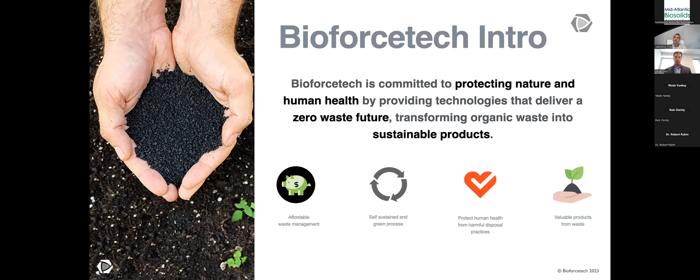Our goal is to transform organic waste and biosolids specifically into sustainable products. If we look at nowadays situation in the United States, mainly about 90% of the biosolids and residuals are utilized between landfill and land application. These 2 options, which have been going on for about 30 years, are now experiencing some pretty severe challenges.

Of course, landfill is probably the most impacted as far as we are experiencing a tremendous loss of value, potential contamination with PFAS, PFOA, CECs, leachate, and of course, greenhouse gas emissions. A bunch of states already have in place a landfill diversion for organic waste. And of course, costs are rising and capacity is becoming less and less available.

Land application, on the opposite, we of course support for those biosolids products so long as we can understand if they're actually being cleaned up, if contamination is really not present. But the point is compared to the previous 10, 20, 30 years, many counties and states are posing bans on using biosolids products on the land application. And we have the same problem at the end that is raising costs, limited capacity in some states or jurisdictions.

So at Bioforcetech Corporation, we do see waste as an opportunity, especially nowadays, with mainly 4 objectives and goals. We can generate renewable energy from those biosolids and residuals. We can remove contaminants, sequester carbon, and create renewable products from those biosolids.

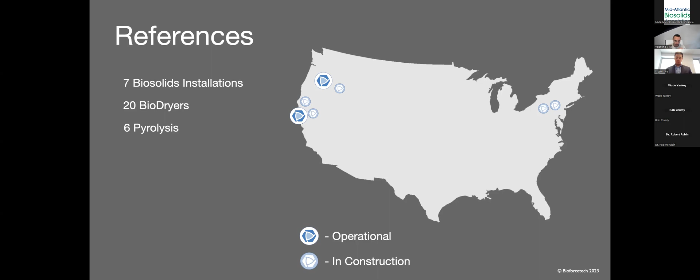The Italian market is another very good market for us, given the very dramatic situation with biosolids and residuals there as well, where they're seeing increasing tipping fees and costs of disposal, and options are very limited as far as what to do with those biosolids.

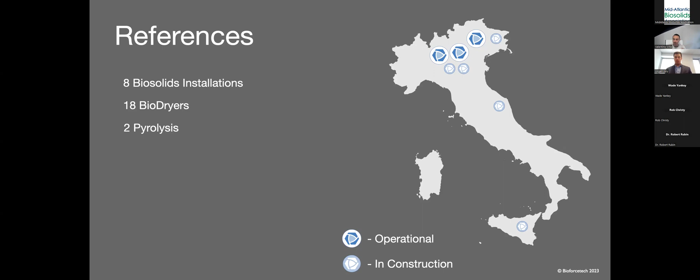So the Bioforcetech system is a 2-step process. The first step is bio drying, a non-conventional drying system that instead of relying on fossil fuel or expensive energy sources, mainly utilizes bacteria, so biology, to dry biosolids very quickly, efficiently, and reliably.

Once we're able to get to a dry product between 80 to 90% dry solids, the second machine comes into play. This second part of the process is our advanced pyrolysis system, with the main goal of transforming those dry biosolids into high quality carbon, otherwise named biochar.

We call it our carbon, our trademark and distinguishing factor as far as the quality and type of product that we can produce throughout our system.

Our goal is very much to stop producing waste, to remove CECs such as PFAS, PFOA, microplastics, and so on through the second step of pyrolysis, to produce energy that can be utilized by both processes to deliver an energy neutral process from a thermal standpoint, and ultimately to utilize our carbon to make sustainable and beneficial use products.

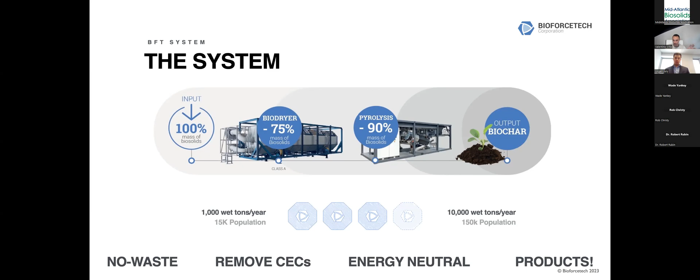Today's webinar is mainly focused on smaller utilities, which our systems can very much serve, from small to medium scale utility, with the sweet spot of the combined train—bio drying and pyrolysis—between 1,000 wet tons per year or less, up to 10,000 wet tons per year. In million gallons a day, that's a reference of between 1 to 7 or 8 MGD average daily flow. That's truly the sweet spot of how to best implement our technology within the wastewater treatment plant.

The first step is called the Bioforcetech bio-drying system, a biological batch drying system that operates at a maximum temperature of 160 degrees Fahrenheit, roughly 65 to 68 degrees Celsius. It utilizes a combination of biology—bacteria already within the feedstock itself, within those biosolids—in order to raise the temperature of the biomass naturally without utilizing any energy from the outside.

Most of the drying in a batch is covered by the biological process of bacteria, and the remaining portion of the bio drying is done through recirculation of energy from the pyrolysis step, if pyrolysis is combined with the drying system, or from a regular source of hot water at about 200 degrees Fahrenheit.

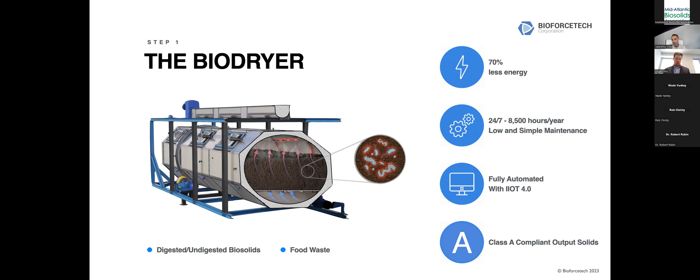The resulting objective is to remove water as efficiently and reliably as possible, with the goal of producing Class A compliant solids by EPA 503, with about 70% less energy than any other dryer can replicate in the marketplace. It's a fully automated system that runs 24/7, up to 95% of running time, so up to 8,500 hours per year, with very low and simple maintenance.

Some key highlights: the average capacity of a single bio dryer. Again, it's a modular and scalable system—the minimum scale is a single unit, and we can expand with multiple units. The average capacity of each module is about 1,000 wet tons per year, assuming 20% solids going in and 90% solids as the discharged product.

We have an average electrical consumption of about 25 to 35 kilowatt hours per input ton, and thermal consumption without pyrolysis is between 0.9 to 1.2 million BTU per input ton. Minimum requirement for solids concentration after dewatering is 17%, and the system can process stabilized or unstabilized solids—digested and/or undigested—so long as we have a minimum of 17% dryness after dewatering, and a minimum volatile content of 45% on dry basis.

The output from the biodryer can be adjusted between 70 to 95% dry solids, depending on how long we keep those biosolids inside the batch, inside the vessel. And again, it will be Class A compliant by EPA 503.

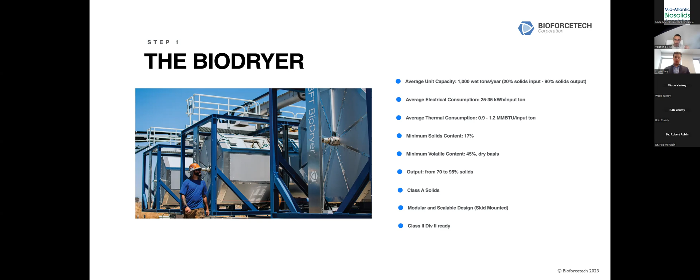It's a modular and scalable design where all of our units are skid mounted and pre-assembled and pre-built at the factory. So it's very easy for us to scale at any time, increasing processing capacity just by adding units as we want to grow. And of course, the unit is already Class II Div II ready, following the NFPA 820.

This is how the biodryer is delivered and built. It's comprised of two skids. The skid to the left has the main cylinder with the catwalk and the screw conveyor for feeding purposes, with motors and sensors. And we have the air skid to the right that has the blowers, the heat exchangers, and all of the piping, making a complete system that anybody can install directly on site.

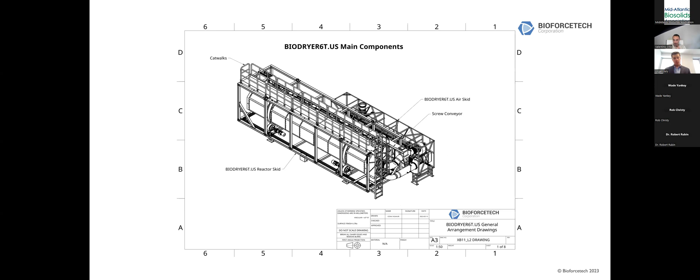Dimensions-wise, each biodryer has been maximized to be able to be pre-assembled and pre-built and delivered as a fully built piece of equipment. So we have a length of 40 feet, and it's 15 feet wide and about 14.5 feet tall.

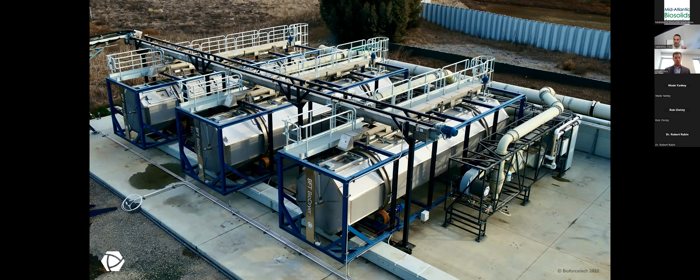Some pictures to help you understand better the scale and how we can expand. We go from installations that have a single dryer up to 3, 4, 6, 7, and so on. You can see some slides of installations here going from 3 biodryers, about 3,000 wet tons capacity, to one with 7 units, about 7,000 wet tons a year capacity, and 4 units, about 4,000 wet tons, and so on.

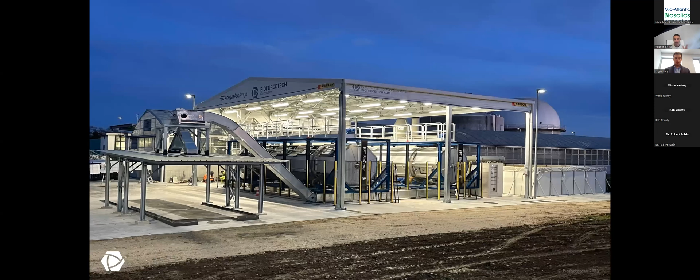You can understand the modularity, the disposition of these units once they are delivered to the client's location. We can expand at any time just by leaving enough space and working with the configuration to best accommodate units for the future, in case that will be one of the goals.

We manufacture our units near Monza, near Milano, in the northern side of Italy. We have a great manufacturing facility with about 45,000 square feet of space available. We have the capacity to manufacture about 30 machines per year and fulfill orders for customers in Europe and, of course, in North America.

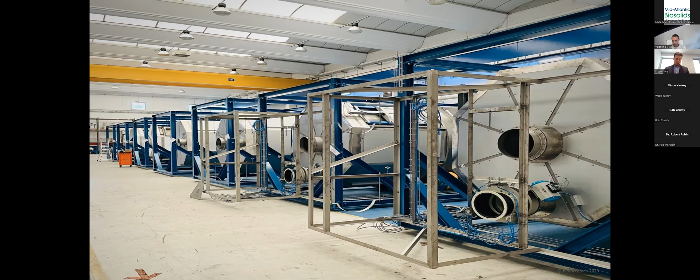So switching to the second step, our advanced pyrolysis system. After we dry those biosolids efficiently on the first machine, the advanced pyrolysis system has mainly 3 goals. The first is to produce the highest quality carbon in the form of biochar, our carbon, as we call it, without the production of any tars, oil, and hydrocarbons. So it's very clean for the process, but also for the end product, which will have no contamination and no resulting bio oil condensating on the char.

The second objective is to create renewable energy that the pyrolysis system will utilize to self-sustain the process from a thermal standpoint, and it will be able to feed the biodryers back with some extra energy to deliver an energy neutral process from a thermal standpoint. The unit follows the same concept here, so modularity and scalability.

The third objective, which is actually quite important nowadays, is an indirect effect of doing pyrolysis the way we do it: the ability to remove CECs such as PFAS, PFOA, microplastics, and so on.

On permitting, we started our journey with the EPA in 2015, receiving approval as a non-incineration technology formally by the EPA. We received permits to operate in the most difficult and stringent air districts in North America, including here in San Francisco, as well as other jurisdictions in Pennsylvania, California, Washington State, Oregon, and so on. So it's very permittable. We went through all the difficulties of permitting the first unit and facility here in San Francisco. Now new permitting applications are much smoother and quicker, due to all the data and source testing we've collected across the years.

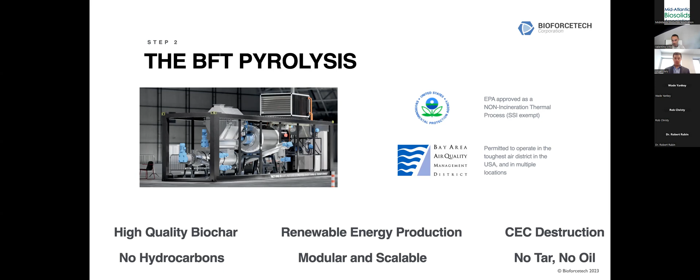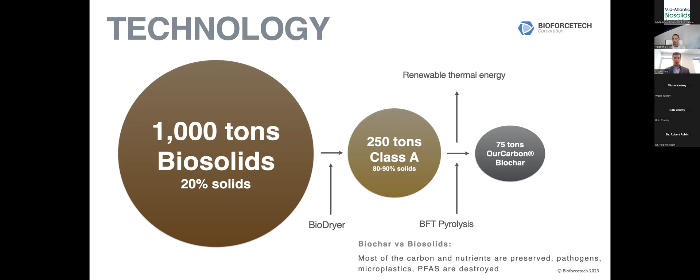A quick look at a mass balance: beginning with an assumption of 1,000 wet tons per year of solids at 20% solids matter. After bio-drying, those are reduced to approximately 250 tons of Class A material, between 80 and 90% dry solids, and further down to just 75 tons remaining of our carbon biochar, starting from the 1,000 wet tons. So we achieve a 90+% reduction in mass, which equals a 90+% reduction in trucks and logistics compared to the wet biosolids at the beginning.

Made with our carbon - again, the name and trademark of our biochar that we can produce through our system is called Our Carbon. The concept is very easy and straightforward: we divert biosolids, we divert organic waste from disposal in the landfill and/or land application. We transform those biosolids and we apply our carbon where it's needed the most.

What we've been doing across the past 6 to 8 years is producing and developing markets that were not existing before for our carbon and for biosolids-derived biochar, mainly ranging from soil amendment use for those biosolids-derived products to pigmentation and concrete additive. We've done great work.

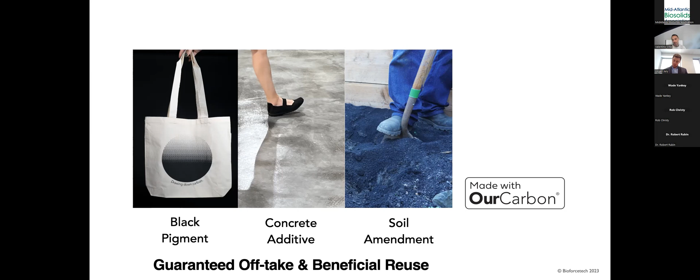So you're not going to be dependent on anybody else for off-taking, or limited by whatever capacity options you have - you'll be able to process and transform your solids in-house, having a consistent and guaranteed offtake for 20 years at no cost.

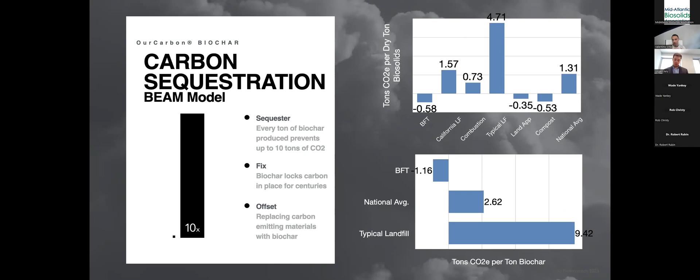Related to producing our carbon, one of our goals is really to also prevent and sequester carbon. Through biochar production, we are fixing carbon in a fixed form inside the end product. LCAs that we developed with third parties, using the BEAM model as well, are showing that each ton of our carbon produced is able to prevent up to 10 tons of CO2 equivalent, especially compared to landfill disposal. So great benefits from a carbon sequestration standpoint, where the BioForceTech system has shown to be the most effective in preventing and sequestering carbon compared to any of the other common ways of processing, disposing of, or beneficially reutilizing biosolids.

Last topic I want to cover for today, of course, is PFAS and CECs. We took it pretty seriously starting in 2018. Honestly, we didn't know back in 2016, '17, and so on that pyrolysis was also going to be effective at removing CECs - there wasn't this rush on what to do with CECs back then.

But starting in 2019 we started entertaining testing, and in 2020 directly with US EPA at one of our full-scale systems here in North America. With EPA, we identified 41 PFAS compounds to be analyzed. The equipment tested was the biodryers and pyrolysis system. We ran a total of six one-hour tests, and we analyzed the wet solids, the dried solids, biochar, tap water, scrubber water, and stack sampling, utilizing a novel method through FTIR and canisters.

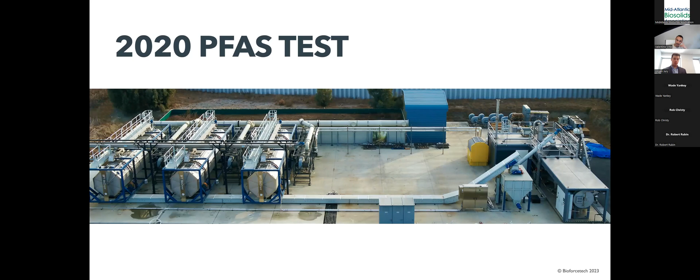This is a picture of the testing site - we have three biodryers and one single pyrolysis unit, with an average capacity of 3,000 wet tons of input material.

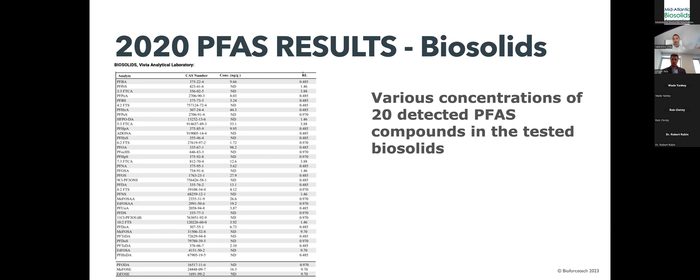Results came back with about 20 compounds detected in the wet and dried biosolids, with different levels of concentration, but definitely good enough for testing purposes to understand the fate of those constituents. Results for biochar came back non-detected across all 41 analyzed compounds, which was an amazing result that confirmed our first testing in 2019.

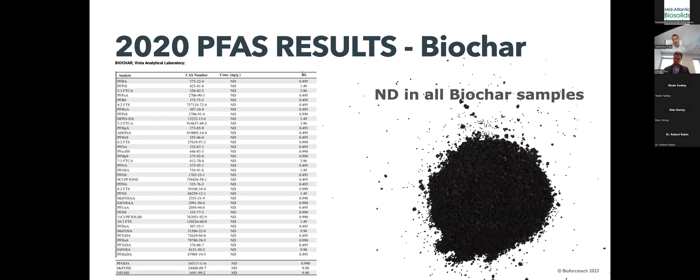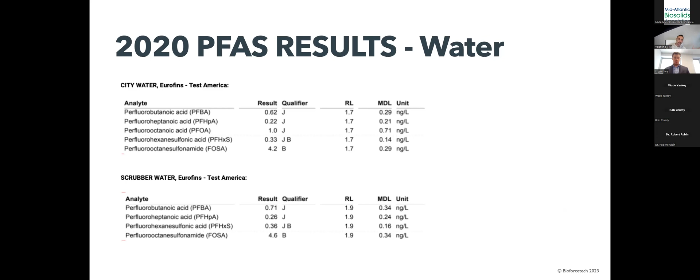This time we also expanded testing on the tap and scrubber water, and of course stack air emissions. On the water situation, unfortunately, city tap water had PFAS and PFOA in there, not surprisingly. The discharge water from the scrubbing unit of the pyrolysis system had the same level of concentration and constituents as the city tap water that was analyzed going into the scrubber.

The million-dollar question was on the stack sampling for air emissions. We utilized a novel method from the EPA, since they did not have an approved testing method back in 2020 - now they finally have one. Preliminary testing showed that nothing was detected above the detection limit of the instrument through the canisters. 17 analyzed fluorinated compounds were not found. The FTIR detected some gases that may have been related to the gas we utilized for the testing purpose.

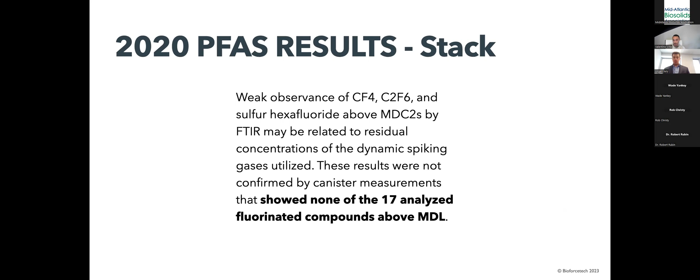The point here is nothing was really detected, although we cannot claim those were accurate and scientifically based because the testing method was not official from the EPA, but it's a very good start for understanding solids, water, and stack. This year we're seeking new and expanded testing with stakeholders and national consulting firms to finally understand the fate of PFAS, with comprehensive mass balance for those compounds. We already received preliminary testing, very encouraging, demonstrating that nothing ends up at the stack. We'll present all the data and findings in the next few months once we finish the new testing.

There's a great peer-reviewed article if you want to read more, specific to the 2020 EPA testing, which has been peer-reviewed and released in February 2022. Let me know if you're interested in receiving a copy, I'm happy to share the link.

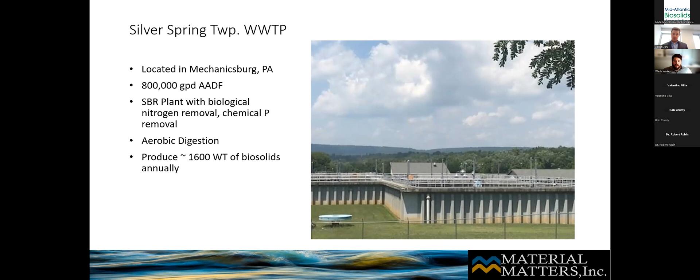So the challenge is Silver Spring Township has never had a beneficial use program in the past. They've always used a landfill, which is pretty typical for these kinds of small plants. I think it was never a major concern for them, as they had a competitive landfill price—their last contract was $70 per wet ton including transportation, so likely a tipping fee of less than $60 per wet ton, which if you do biosolids business in the mid-Atlantic, you'd be happy getting that price.

Unfortunately, that contract ends very shortly, and they're expecting an increase of roughly 100% for their next contract, up somewhere around $100 to $120 to $150 per wet ton. If that holds true, that's about a $112,000 annual increase in solids management costs. So at that point, they thought maybe they should look at other potential solutions for managing their biosolids.

Silver Spring contacted us to do a feasibility study to see if and how they can meet Class B standards without making massive changes to the treatment plant. They were open to some technologies, mostly lime stabilization, because they could input that at the end of the process without affecting the treatment process already established at the plant.

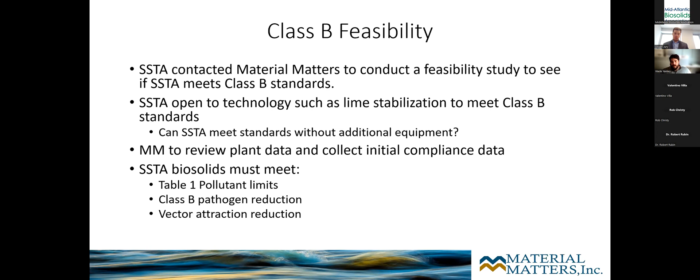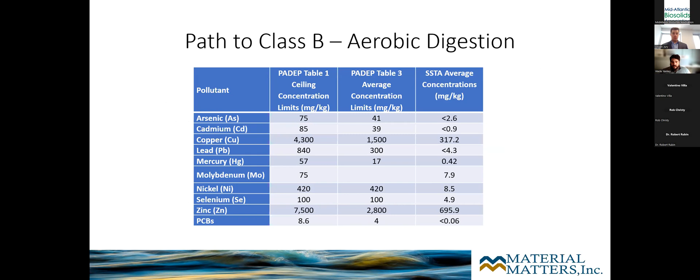So we didn't see any problems in their metals concentrations. In fact, all of them were not only below the Table 1 ceiling concentrations, but also the Table 3 concentrations, which we use for Class A EQ standards. This is sort of what we'd expect, and no changes are required to meet any of these limits.

Moving on to pathogen reduction, if you have an aerobic digestion plant, you basically have 2 options to meet pathogen reduction standards for Class B. Regardless of treatment technology, we can all use alternative 1, fecal coliform analysis, to meet Class B standards. Then there's a PSRP, process for significantly reducing pathogens, for aerobic digestion specifically.

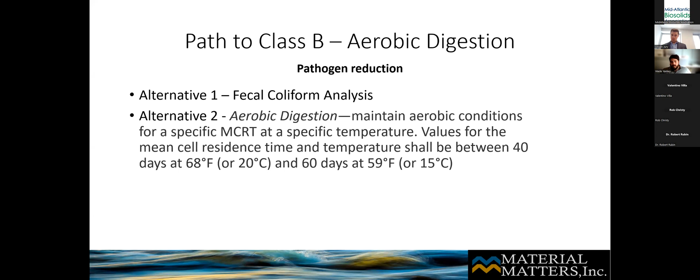That is, you need to maintain an MCRT between 40 days at 20C and 60 days at 15C. It's very unusual to find plants that have enough digestion capacity to meet this, and in this part of the country there are significant parts of the year where we operate below 15 degrees C. But we wanted to look at both options and see if they could meet pathogen reduction without making changes at the treatment plant.

So we collected samples for fecal coliform and had those analyzed, calculated the geometric mean. The geometric mean needs to be below 2 million for Class B standards, on a dry weight basis. Silver Spring Township was able to meet fecal coliform without making any changes, which was encouraging.

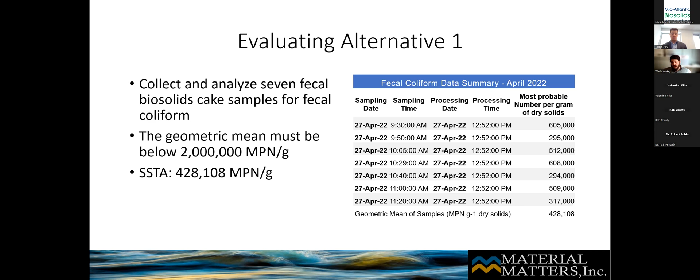Of course, many treatment plants would prefer to use a process-based pathogen reduction method over testing, for a number of reasons: the logistics of managing fecal coliform samples due to short hold times, cost of laboratory analysis, availability of labs, etc. So we did also look at alternative 2.

Going back to what I was saying about alternative 2, we're limited to temperatures of 15 degrees and above, so during certain parts of the year this alternative doesn't apply at all. So really, long story short, alternative 1 typically makes sense for aerobic digestion users.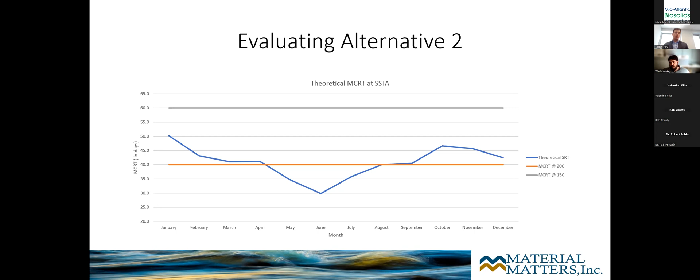So then the next thing we need to do is take a look at vector attraction reduction for aerobic digestion. We have really 3 options. Option 1 is, if you work with anaerobic digestion at all you're probably very familiar with it, and that's a reduction of volatile solids by 38%.

This is very unusual to actually be able to achieve in aerobic digestion. Also, the treatment plant did not routinely track this data in and out of their digesters, so we weren't able to calculate this with any certainty.

Option number 3 would be to digest your digester contents on a bench scale at 30 days, at 20C. If the volatile solids reduction is less than 15%, you meet vector attraction reduction that way. This is essentially an indicator of stability, that the volatile solids have already been significantly reduced in the digester, and this additional digestion doesn't show significant further reduction. We don't see a lot of folks use this, and certainly Silver Spring Township had not done this in the past.

But by far, option 4 is the most typical aerobic digestion vector attraction reduction method, using the SOUR test. The SOUR test has to be lower than 1.5 milligrams of oxygen per hour per gram. I know that's a mouthful.

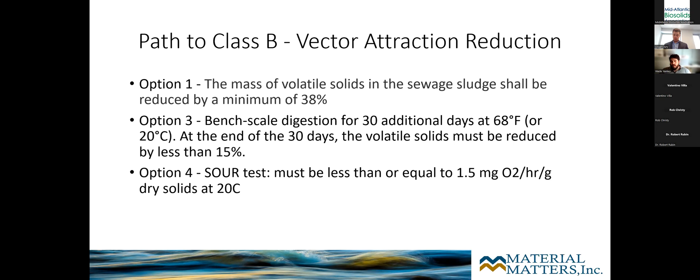All that to say, it is adjusted for total solids and for temperature. So we did go and do SOUR testing at the treatment plant. We did this at the end of April. The digester temperatures are fairly warm, so we would expect, in a warmer digester, more robust microbial activity. We would expect to be able to meet SOUR in warmer temperatures.

But the SOUR was actually almost double the standard. The standard is 1.5. The adjusted SOUR for this trial was 2.5.

Not being able to meet vector attraction reduction obviously limits your ability. I mean, you can meet class B and you can incorporate field VAR, but it certainly limits your ability to have a successful class B land application program.

So, being at the treatment plant, we felt like they had a considerable amount of digester capacity. We do see a lot of treatment plants that are short on digester capacity, and they just don't have the capacity to get the stability to meet vector attraction reduction, but it seemed that Silver Spring, relative to their size, had a considerable amount of capacity.

So we thought we should take a look at their actual capacities in more detail. They do have 3 aerobic digesters. They have about 710,000 gallons of capacity, and they only waste about 750,000 gallons per month. So that is over 28 days of MCRT, even if the digesters are not decanted.

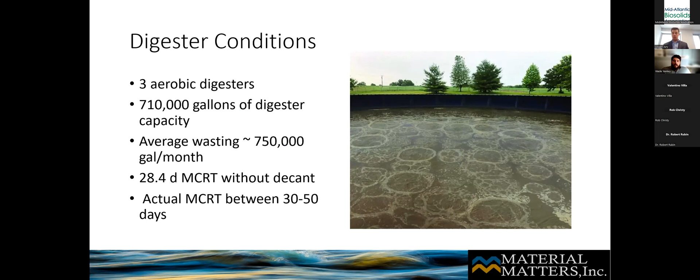So I wanted to compare that to some digestion design criteria to see sort of where they fell compared to what we feel like would be design standards. 59 is 15C and 68 is 20C. So we would be in this kind of range for hydraulic retention time. That's solid retention time without decanting. We'd be looking at somewhere in this like 50 plus days. So they're sort of borderline as far as the design criteria to meet the standards.

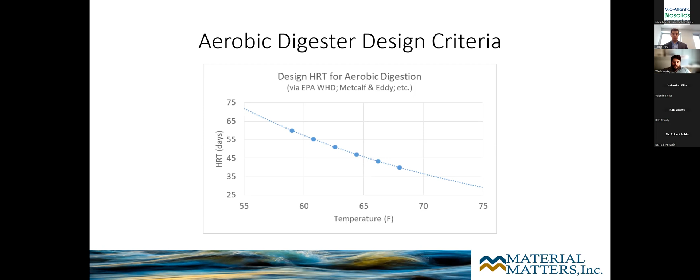But I wanted to take a little bit of a deeper look, and we've done some other work for some other utilities where we looked at degree days as treatment time as a function of degree days. Degree days is the product of the temperature in degrees Celsius multiplied by the SRT in days, that's the residence time in the digester. This number can be used to evaluate aerobic digestion below 20C.

We have a bunch of data from a similar treatment plant where roughly 300 degree days have been producing passing SOUR results. That's a WAS only aerobic digestion, similar upstream treatment processes. So I wanted to compare using some selected temperatures. SSTA doesn't track their digester temperatures routinely, so I just selected a bunch of temperatures to use as a benchmark to see if we felt like they would routinely pass this sort of 300 degree day benchmark.

You can see this is 20 degrees C, and then down to 8 degrees is the bottom line. We used the monthly average MCRTs against those temperatures, and plotted them against this 300 degree day benchmark. As you can see, only at the lowest temperatures do we ever dip below that 300 degree day mark, and the months that we do is in the summertime. They have probably the most wasting in the summertime as they're adjusting from the spring, bringing their MLSS down in their reactors. So we would expect that essentially they would meet this 300 degree day test all year long.

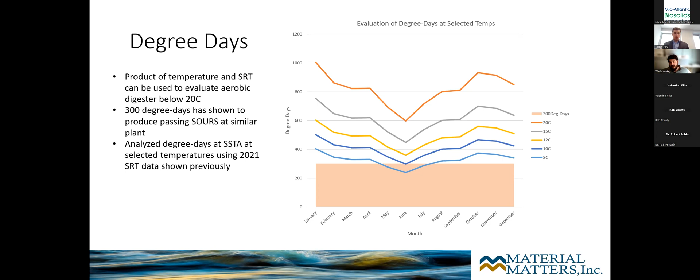So we started talking to the operators about how they operate their digesters. There's sort of a couple of ways you can operate an aerobic digester. The typical thing to do would be to just fill your digester with your waste activated sludge, aerate for a period of time, decant, remove whatever clear water you can, and continue to fill and aerate, and then dewater when you can no longer effectively decant your digester.

All 3 digesters could be operated in parallel like that. Or you could operate them in series.

And if you operate them in series, of course, you feed one digester, you decant it until it's full. We transfer to the next digester. We do the same thing. We transfer to the 3rd digester. And then ultimately always dewater from that third digester.

And what that does is maximizes your digester capacity because you're decanting as much as possible. It eliminates short circuiting, that is feeding the same digester that you would be dewatering from, which could put fresh undigested material into your digester, which could obviously skew your results.

And really the important thing is it maximizes your time under aeration. That's the main goal, right? We're trying to get as much time under aeration as possible to create the most stable product.

Because there's never been a beneficial use program at SSTA, they weren't really operating their digesters in either of these ways. They were really operating them more as aerated holding tanks. If they had capacity in one, they would pump to that one. If they had capacity in another one, they would pump to that one. They would dewater whichever ones were full, but not really with a real treatment scheme in mind, just sort of pumping to places where they had space to hold solids.

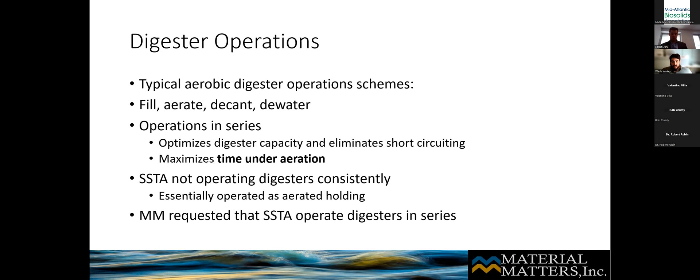And I went back in the wintertime and ran SOUR again after they had been operating like this for a few months. At a temperature well below that 15C that we talked about, just sort of where the regulation stops for pathogen reduction, and a considerably cooler temperature than we tested and failed at in the spring, they were easily able to meet SOUR at 1.2 milligrams of oxygen per hour per gram of total solids.

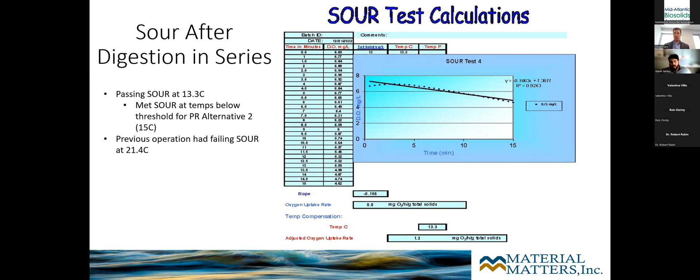I thought this was very convincing that we saw this kind of change through a simple operational change. So, they are, of course, going to now pursue coverage under the PAG-08, that's a Class B permit here in Pennsylvania. Of course, meeting the standards is not the only thing that will get you a successful biosolids land application program.

So I want to make sure we made this plug. Silver Spring Township is also installing cake storage. To have a successful and cost competitive land application program, you really need to be able to manage your solids in a way that falls in line with cropping and weather. And if you cannot meet total solids of 20% from dewatering, you are not allowed to store on the farm. So that basically severely limits your ability to haul and land apply during significant portions of the year, being the winter when we have freezing, when there's crops on fields, and really anytime the weather interferes.

And Silver Spring Township does not dewater to 20%. So they are installing storage on site to make this a more attractive and more successful land application program. And they are not planning any solids treatment upgrades. Of course, we're not talking about the things that could come in the future. This is their plan to manage their solids before any of those triggers come into play. But I just thought this was a great example of being able to take the things that you have and make a few strategic changes and really see results on the other end.

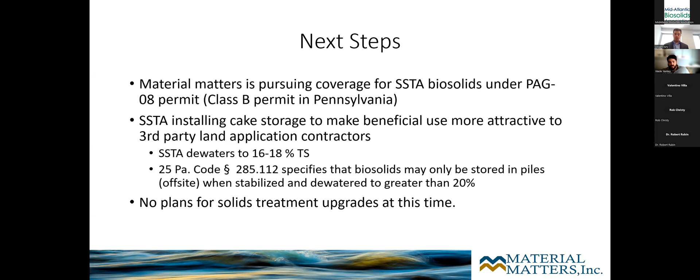Thank you, Wade. Yeah, it was pretty interesting. And I think it speaks to one of the challenges that we have in the Mid-Atlantic region, where smaller facilities, sometimes the operations of their existing systems are not optimized. And keying in on that can really save clients some money.

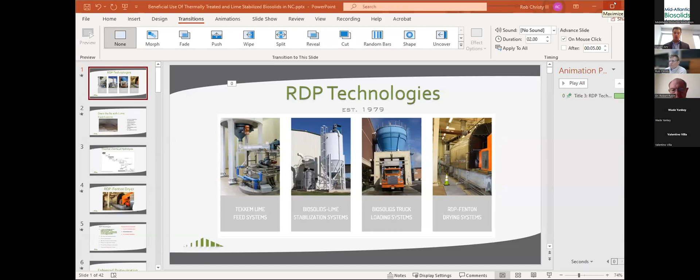So as a quick bio on both these guys, so we know what's going on. Dr. Rubin is an emeritus professor, as I mentioned, at NC State University. He's been involved in water and wastewater management for over 50 years. Throughout his career, he's focused on land-based and natural systems for treatment and management approaches that are reliable, resilient, and sustainable. He was a visiting scientist at US EPA, where he helped with development of management and design guidelines for decentralized wastewater systems and other natural systems.

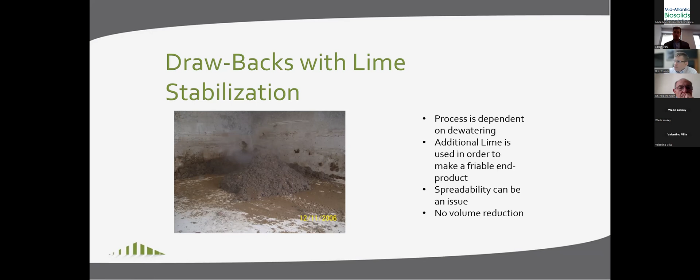So essentially, if you had a 15% cake, what would happen is you would have a wet product going in, and you would basically have a wet product going out that wasn't stackable or friable. So the process is typically dependent on dewatering. Now, the only way you can counter that, because there is no evaporation really going on of water, is the addition of lime to the product. So with the 503s, typically you need just enough lime for the pH to get to 12, and that typically could be anywhere from a 10 to 25% lime dosage. However, with Class A stabilization, what would continuously happen was the addition of more lime to bulk the product up, and then you would be looking at anywhere from 60 to over 100% lime addition. That would not only add obvious operating costs, but with that amount of lime, you would significantly reduce the amount of acreage you could apply to a farm. So you would be getting negative benefits, both agronomically and at the wastewater treatment plant.

And when RDP started with Class A stabilizations, this required a lot of studies to be done, and we started working a lot with Dr. Bob Rubin, specifically in North Carolina. We continue today with this slide, showing another process where we're developing a composting process using natural heat.

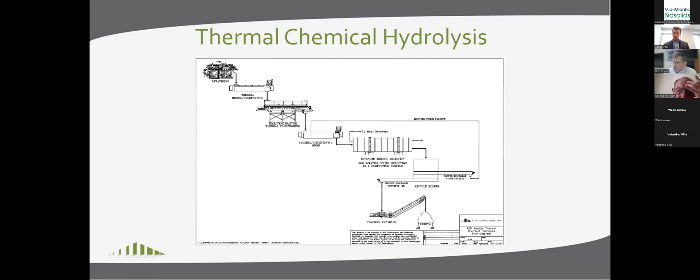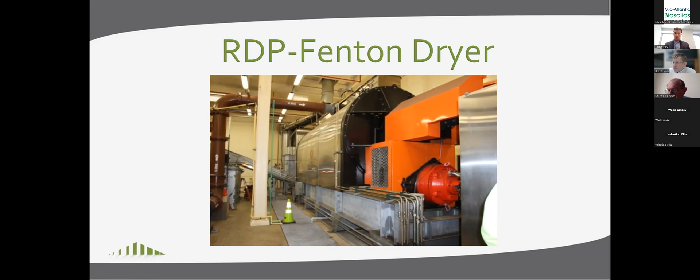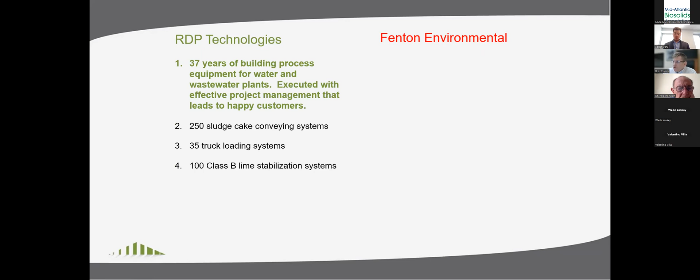Morehead City is a coastal community, small coastal community with acidic soil. Because they have acidic soil, they were interested in lime stabilization for the benefit of treating the local soils, and they were also interested in a biosolid dried product where they were getting volume reduction. Then subsequently in 2015, RDP had purchased the intellectual property to the Fenton dryer. Fenton had basically cut their teeth industrially, whereas RDP has primarily been in the municipal industry. So there was quite a bit of synergy there with their mechanical process and our know-how, and it became a pretty good fit for both of us.

So as I said, Morehead City is a small coastal community, and in venturing out into a Class A product, they were looking for a soil amendment that would best help them distribute the end product in and around the community. In evaluating those two different technologies, they saw some drawbacks. What RDP came up with was basically a third option, where we tried to merge the two inherent values of either process and hopefully come up with a better solution for the small community.

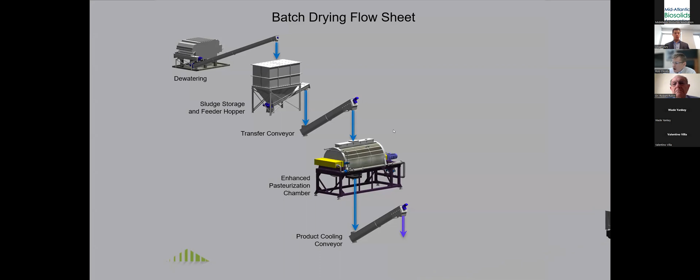If you look here, this is just a quick flow sheet of a typical batch dryer, which was kind of the premier technology for small communities at that time. You have a wide spot in the line for your sludge, you basically have screw conveyors coming in and out, and then a dehydration chamber in the middle for evaporation. Now, what RDP did was basically meeting in the middle.

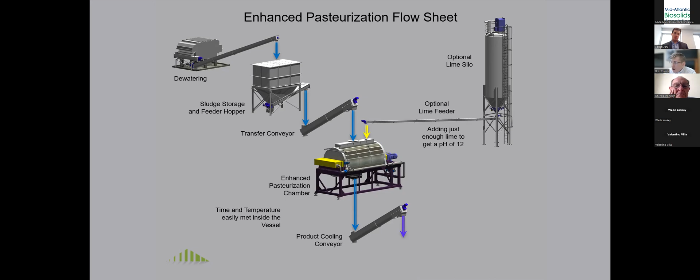We added lime to the system. Now with the pasteurization chamber, we don't have to depend on dewatering anymore. We can get to a moisture concentration that's desirable both for the plant and volume reduction, but also for the local farming community. This allowed us to get away with the traditional negative effects of lime stabilization, and because we weren't dependent on dewatering anymore, we can add just enough lime to get the pH up to 12, without adding more as a bulking agent, significantly reducing chemical costs for traditional lime stabilization.

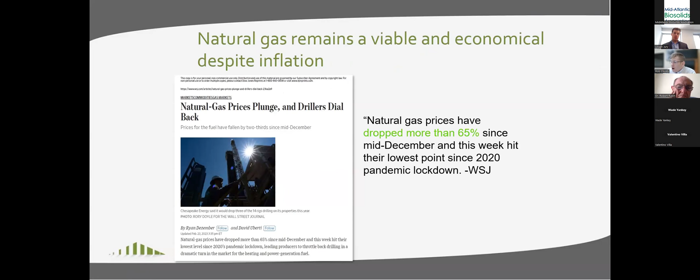Natural gas is still a tried and true method for heating sludge. With thermal fluid systems, the nice thing is they're pre-engineered and require little maintenance compared to other technologies, specifically steam or dusting issues. That's the typical flow sheet of a system on skids from Fenton drying systems.

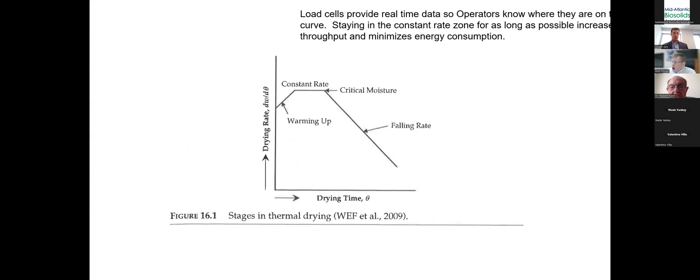One of the key features RDP added to significantly enhance this process was putting the system on load cells. That allowed us to do three things. First, it allowed us to dial in the moisture concentration.

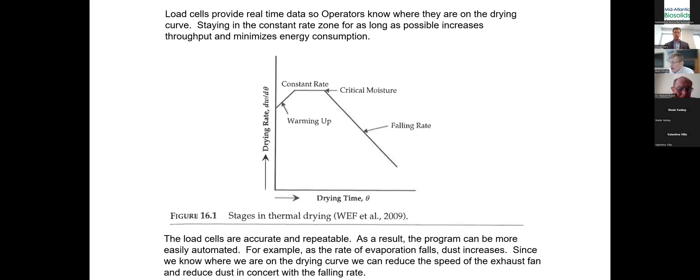This is a graph looking at a traditional batch dryer, showing where the optimal drying rate is, and it allowed us to optimize that.

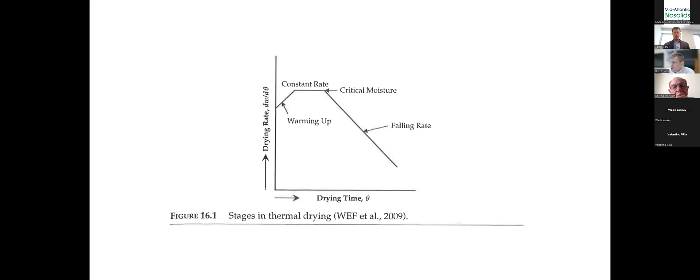And lastly, automation, where the system can run pulse feed and pulse discharge of both lime and sludge automatically, as opposed to the previous technology where that was not possible. This slide basically explains the same thing.

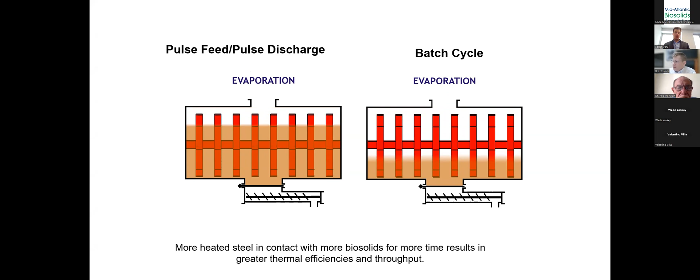Here's an animation of it. Instead of running in batch mode, RDP could evaporate to a certain solids concentration and then add more sludge. We could probably do this three or four times before starting to come up against torquing issues, but this allowed the system to become a lot more efficient, getting more sludge in contact with the hot oil disc.

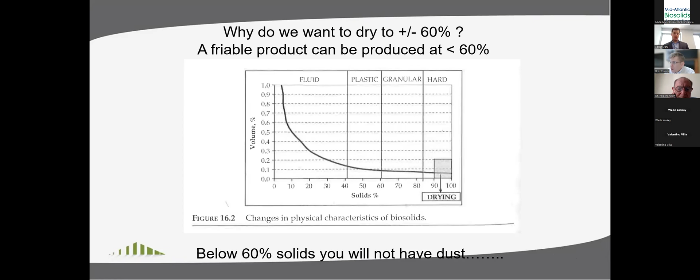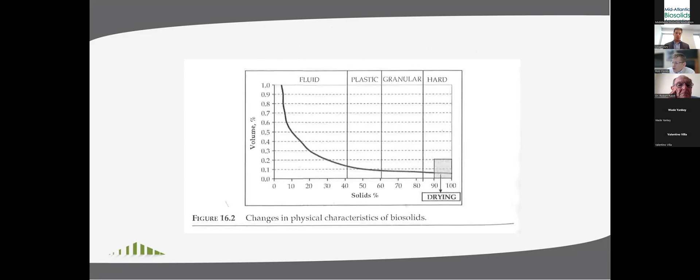With this process, because we're adding lime, we don't have to go to 90% — we're technically a pasteurization process. The load cells also allowed us to optimize the solids concentration. Historically, this graph shows what dryers encounter going down the sliding scale to 90%. Because we add lime, we can get anywhere from a 55 to 75% end product, with our sweet spot being 55 to 65%. That gives us about a 3-fold volume reduction versus a 4-fold volume reduction.

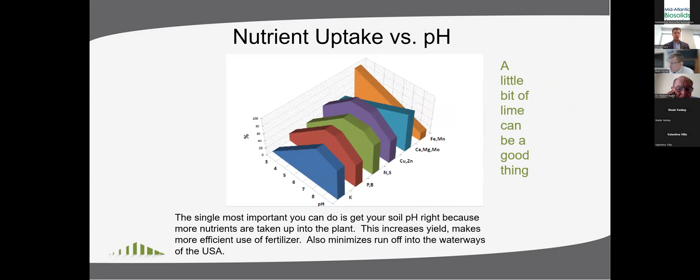So the question is, why pasteurization? For this facility venturing into Class A, what they liked was the flexibility of pasteurization. It also has a commercial name similar to composting, and as Dr. Bob will talk about, it was necessary for nutrient uptake with the additional chemical.

If I can, hopefully I can play the slide very quickly. And if I can't, I'll just leave more time. It was working earlier, sorry. All right, moving along. So I can come back to that.

As I kick it off to Dr. Bob Rubin, I was going to leave with this slide where hopefully we can show the benefits of adding a little bit of lime as a positive influence. So with no further ado, Dr. Bob Rubin. Thank you — and just go through the slides real quick, if you would, please.

That's me, and I'm not going to belabor that. I think our goal — everybody in the biosolids industry has the same goal — is to develop a comprehensive approach to wastewater treatment and solids management that will assure the recovery of nutrients, energy, and water in a sustainable manner. That's what I call the new paradigm. We've certainly achieved that in Morehead City and some other applications here in North Carolina.

Residuals, you all know this so I won't belabor it, but residuals are a significant management issue for municipalities and wastewater treatment operations internationally. It's not unique to North Carolina or to the states.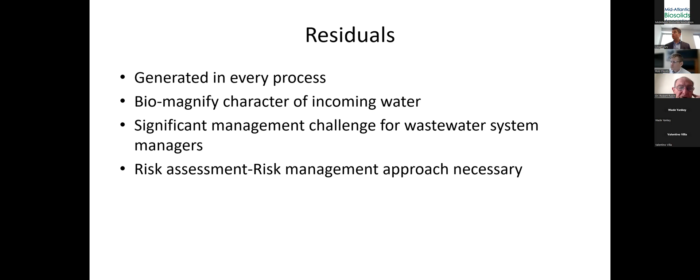And land application does have a lot of benefits. We can do PFRP, Class A product, with fewer site restrictions. We can do Class B product with more significant site restrictions. Here in North Carolina, our biggest restrictions are separation distance to water table. With Class A or PFRP product, we don't have to worry about that anymore.

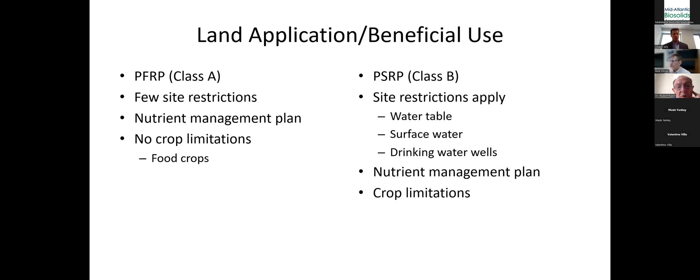So we're looking at biosolids both as a nutrient source and as a source of organic matter. Many of our soils in North Carolina are losing organic matter, and I firmly believe one of the best ways to sequester atmospheric carbon dioxide is to put that carbon in soil and build soil organic matter levels. We've done some work looking at that with our turf crops, row crops, and some of our forest crops.

Our issues are what it is and how it will be applied, how it will be best used, and what are the nutrient levels. All plants need nutrients, and there are limiting nutrient additions that can be applied to land here in North Carolina.

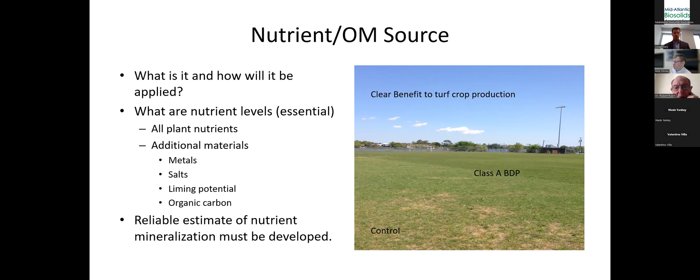We are required to develop a nutrient management plan that really optimizes the potential uptake of nutrients in plant material. Nitrogen and phosphorus are the two nutrients of greatest concern here.

So if you look at the nutrient levels in the thermal process material, and the thermal process material incorporated with compost, you can see that the thermal product with compost had a little higher level of nitrogen, pH was a little lower, and the ag lime equivalence was a little bit different - it took more product to equal a ton of agricultural lime. But because we weren't lime limited, we could apply more biosolid material as compared to just a lime-only addition.

And our nutrient management plans require us to look at carryover nitrogen and carryover phosphorus. In all of the samples we did, let me note that the regulated metal levels were all below the table 3 values in the 503 rule.

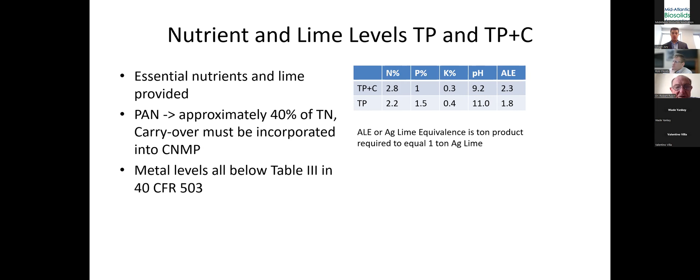So my job working with RDP was to try to show some of the benefits of both the thermal process material and the thermal process material that we commingled or co-blended with compost. Yard and leaf waste, some food waste, materials that occupy space in landfills, can be composted very nicely. By mixing these two materials, the thermally processed and lime-added biosolid with the compost, we were able to get excellent crop yields and good high quality crop materials.

And again, our comprehensive nutrient management plan is to provide a balanced agricultural application that's consistent with crop need. And by the way, the 590 standards apply. So we have to look at what we call the right rate, and that's the nitrogen need and the phosphorus needs of crops.

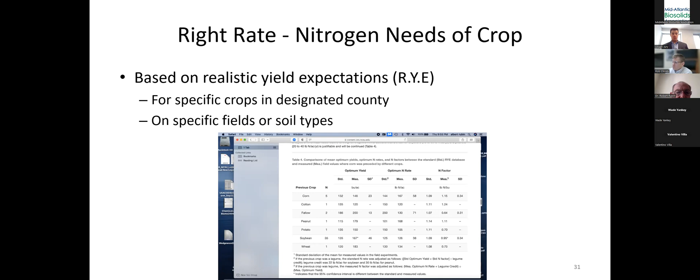And the important thing there is those realistic crop yields and realistic yield expectations. We have managed our nutrient program based on actual crop yield data associated with the counties in North Carolina. And we think that these are realistic, based on about 30 years of crop yield and crop test data through our Department of Agriculture.

So again, this is typical for any land application program. What are the crops? What are reasonable expectations for yield? What do soil test results currently show? And what can we do to control losses from the site, both leaching potential and erosion control?

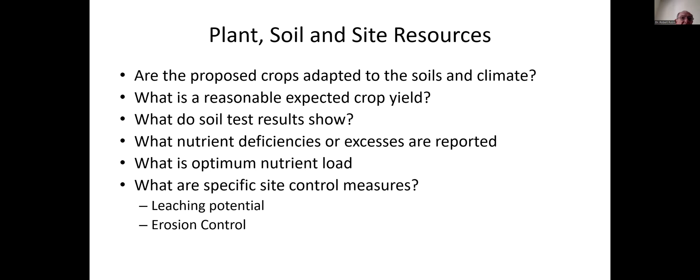Might have locked up there. Maybe we lost you, Dr. Bob. Frozen in time.

Well, we'll give him, I guess, a minute to see if he reconnects. I don't know, Rob, if you want to roll through some of his items. Well, if unfortunately Dr. Rubin can't come back, what I'll do is I can roll through the slides real quick and we can just conclude.

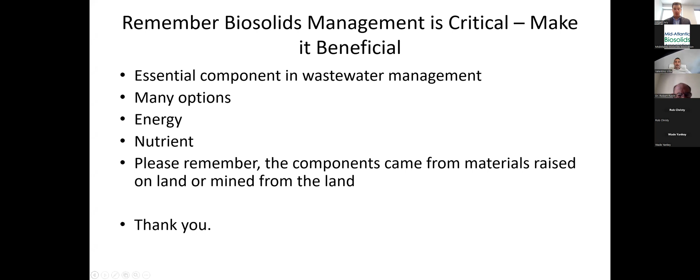Valentino, another one here for you - what percent of the biochar is being sold, and what revenue utilities are generating from the sale of that. All right, so we are selling everything we produce at the moment, which is always a great thing to say.

Sorry, I think my connection just dropped a second. Just want to see if I am back. You guys hear me? All right, sorry. Yeah, all right, sorry, I just went away for a few seconds for the connection problems here.

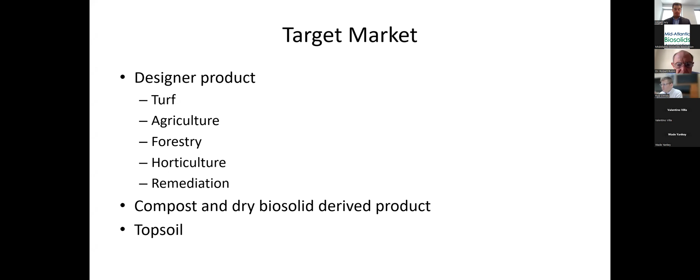Still no luck from you. Rob, I'm not sure if I can hear you either. Can you hear me at all? I got you, okay. It looks like your mic is on, Dr. Rubin, but we're not getting any audio from you. I think you might have frozen again. Scroll back up. Oh, there you are. Did you hear me? Okay yes, just stop at any one of these.

Okay, what I've done here—and I think these issues of crop yield and soil organic carbon are really important—we applied the materials on fescue crops, on row crops, on turf, and this is just one example of our agronomy. Site number one was the thermally processed material and compost.

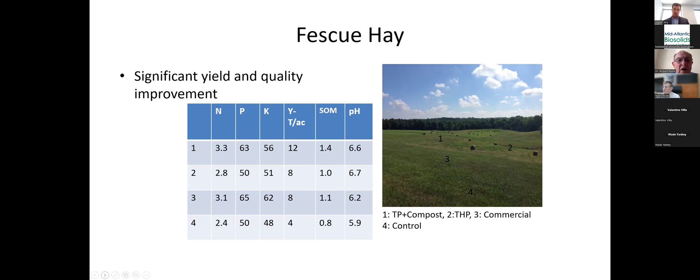Did everybody hear my explanation of the fescue crop? Okay. We also looked at sorghum, we looked at turf crops, and...

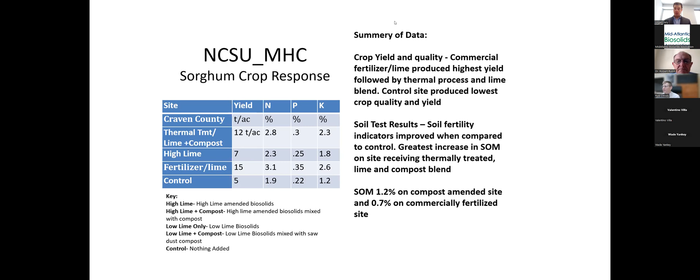Well, you might be in and out a little bit there, Dr. Rubin. So I know we have a couple of Q&As here that are still on the list, and I'll pose a couple of those, as we're running up on the end of our 90-minute block here.

Wade, I had one for you that came in: what will Silver Springs Township expect to pay for a beneficial use program?

Yeah, that's a good question, I realized I glossed over that earlier. We've been seeing full service beneficial use programs in our region operated totally by a third party, like a Denali Synagro kind of group, at about $45 to $55 per wet ton. So already less than what Silver Spring Township is currently paying for landfill, and certainly less than they would be paying if their price goes up. If they were able to manage that program somewhat on their own—what we call a self-managed program, where they would bid the transportation and work directly with the farmers—you could see additional price decrease from there.

Okay, great. I know it hasn't been too long since you completed that analysis for them, Wade.

How has continued operation and compliance with those operational changes been? We have not gone back to them since then, but I haven't heard that things have changed. It's been a mild winter, so I expect they've had pretty good luck with their digester. If we had a really hard winter, they may see some challenges during the really cold part of the year, but no significant changes since they made the operations move. They are seeing less solids come out the back door, of course, which has to do with the additional volatile solids destruction, but they also put on some bioaugmentation process in their collection system, so that may have to do with that as well.